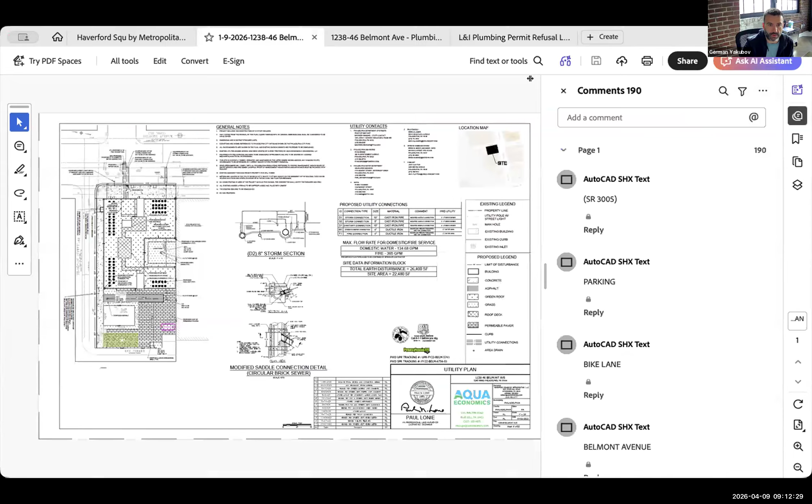All right, Chairman, I'm going to interrupt you for one minute because for the record, we have to establish ownership. Sure. The owner is listed on the official documents as Haverford Square Metropolitan One LLC. Could you please, for the record, state that you represent that entity and you are the owner of the property? I do, and I am. Perfect. Sorry I interrupted you. Please proceed. No, it's okay.

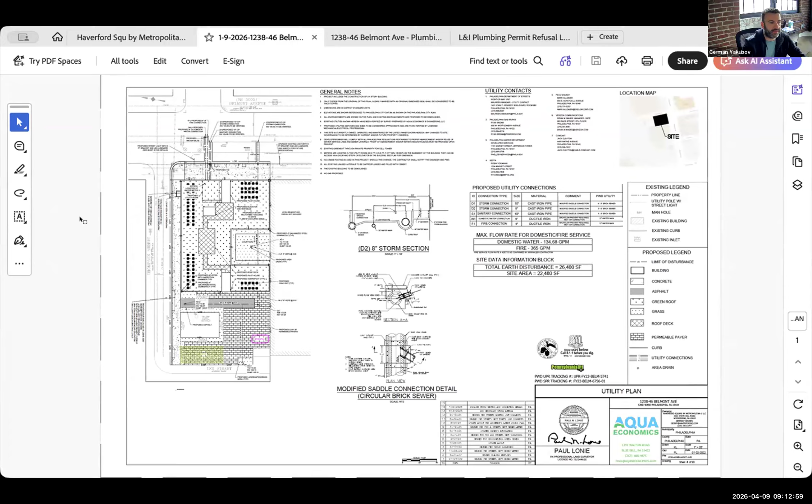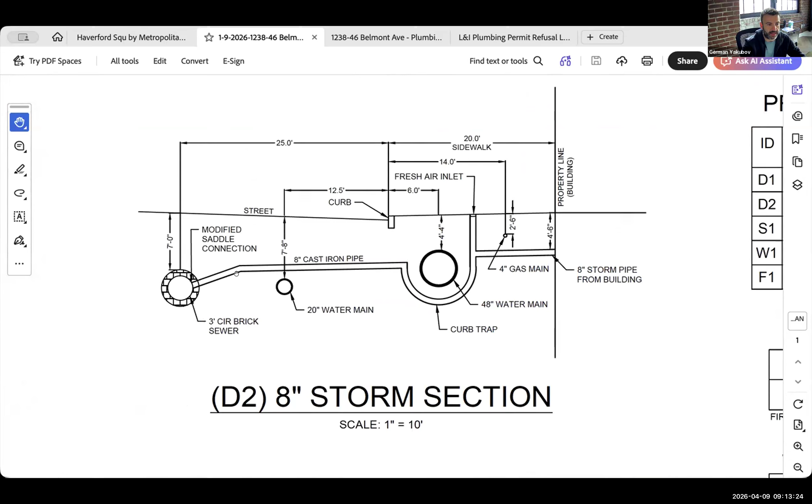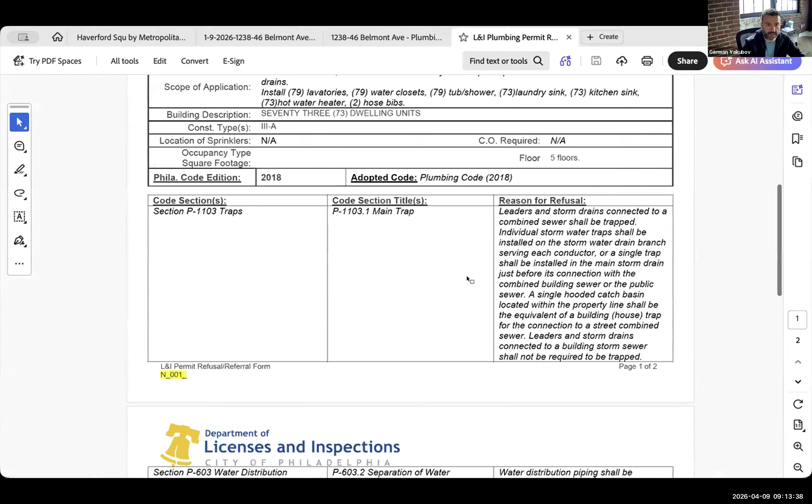So I think the issue is that there's a pipe in the way of us getting to the brick sewer, this 48-inch water main. So we can't go up above it, I guess. So the plumber has suggested building this custom trap that would, I guess, go underneath the 48-inch water main to get us to the brick sewer. And I guess part of that setup is against the code. So that's, I guess, the gist of it. Rudy, if you want to talk about how you see this.

So based on the depth of the storm that comes outside the building, we cannot be less than 3 feet exposed under the ground.

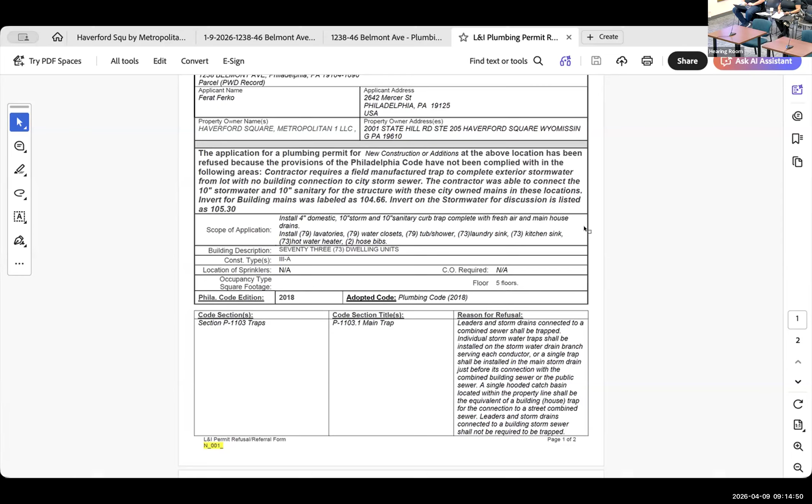Just a moment, Mr. Tafani, we are having some difficulty understanding you. Do you have multiple devices with you? I heard, sorry, but I'm not sure what came after because there's an echo on your end. Is it good now? No, could you attempt to mute your device, please? You hear me now? It's still a bit garbled. Do you have multiple devices streaming? I just had my phone, but I turned it off. I can't understand you, I'm sorry. Just a second, please. Rudy, could you try it again? You get feedback, Rudy. I think you're next to a speaker, or you might have a phone and a speaker next to you. That's the problem. Let me try to do it different. Rudy, do you have a headset on by any chance? No, I don't have it at this moment.

Okay, I'm going to direct a question toward you. The plumber of record is listed as Ferat Ferko. Could you let the board know what relation Rudy has to the project? I think he's Ferko Plumbing. He works for Ferko Plumbing? Yes. Okay. All right, Rudy, let's give it a try.

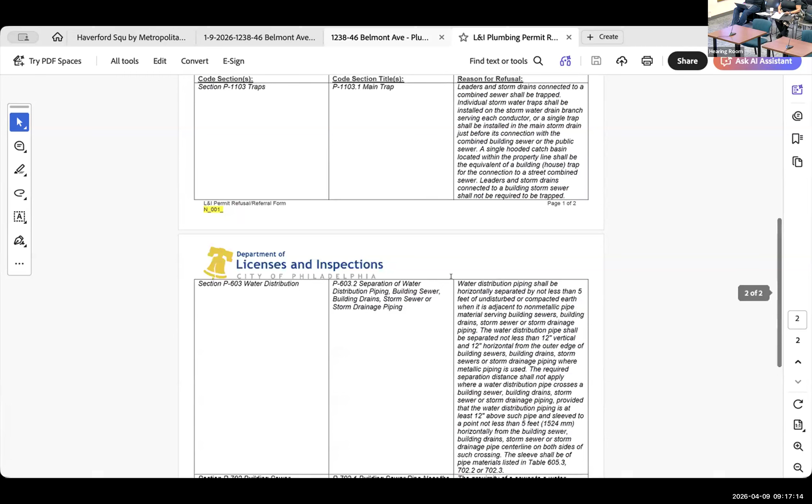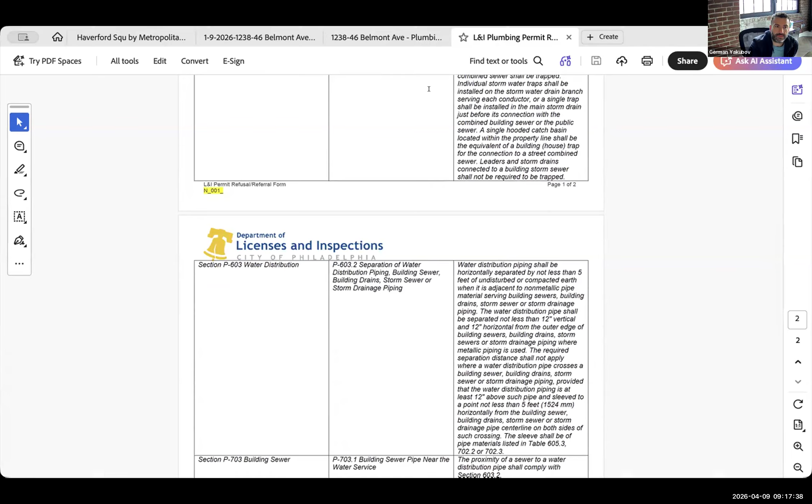I think it's the same thing, but I need to log out and log in again. Okay, let's give that a try. Sorry about that. He's gonna go out and come back in. Hello, everyone. It's a little bit better, Rudy. Rudy, can you talk to us a minute? Yes, I can talk. Great. Much better. Okay, gentlemen, please proceed.

So in this case, we have an 8-inch storm line coming outside the building, and based on the existing utility plan that we had in the beginning, it shows that the depth of the 48-inch water main was 3 feet, and we assumed that we could go underneath because we couldn't go less than 3 feet on top of the water main with our storm line. But physically, after we exposed the front of the building and the 48-inch on the sidewalk, it came up that the 48-inch water main was not 3 feet deep but 4 feet 4 inches deep.

So in this case, it interfered with us going underneath, passing the water main, and then installing the trap, because we have a 20-inch water main in front of us before we reach the sewer. So in this case, we cannot make that connection.

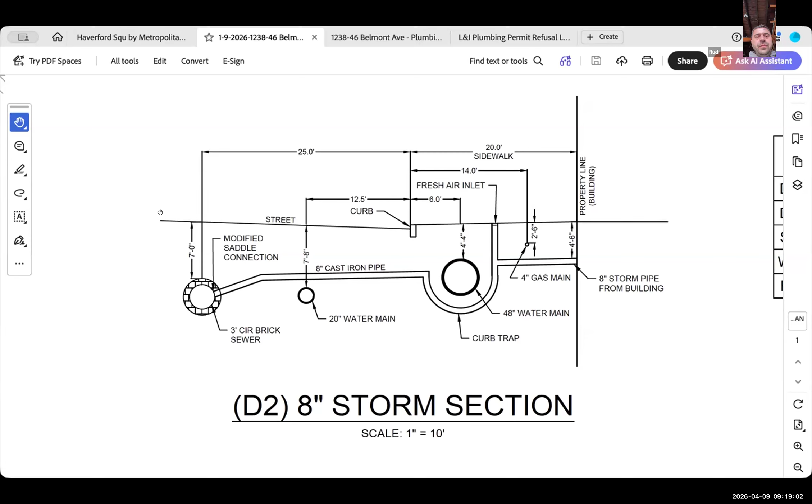Okay, can you explain to the board how you're proposing to construct the trap that you're showing? So my proposal was to build a curb trap, because it's going to be only stormwater, not related with sanitary. Building a huge trap passing the 48-inch water main, and that's going to let us make the connection straight to the sewer.

And what do you propose to construct a trap out of? What type? It's going to be all cast iron fittings. Following the code, to be at least 1 foot away from the water main, and it's just going to be built by us.

Okay, just to establish for the record, the sewer you're tying into in the cartway is a combination storm and sanitary, correct? This is a combined sanitary and storm. Combination, correct? Okay.

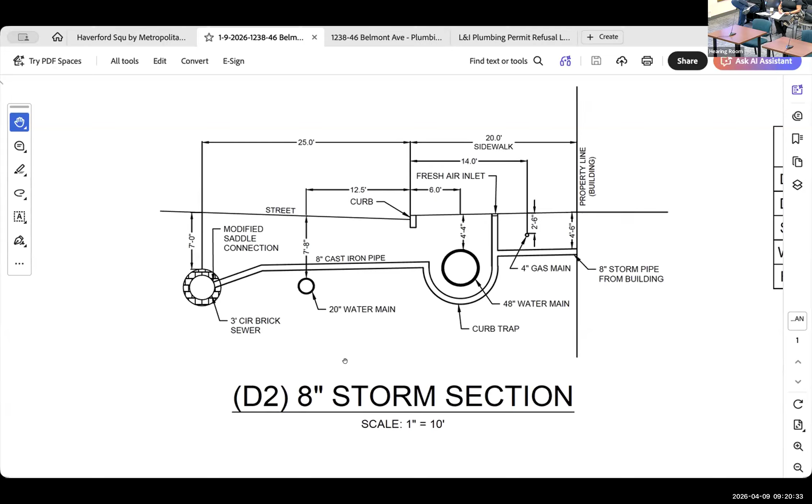All right, what we're going to do now, gentlemen, is the board will begin to ask questions. I'll call on the board members one at a time, starting with myself, Walt Krasinski, I'm chairman of the board. My question is, you showed two other connections. Did you have any problems with the other connections shown on the utility plan?

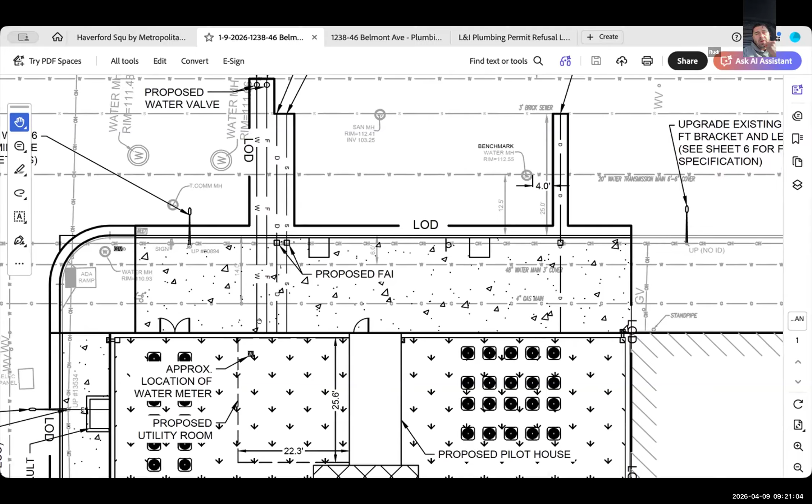We didn't have problems with the two other connections because we are able to be on top of the water main. But the only problem here, if we go on the proposed storm connection, we cannot connect the backyard water and the courtyard. Okay, all right, that clears a little bit up.

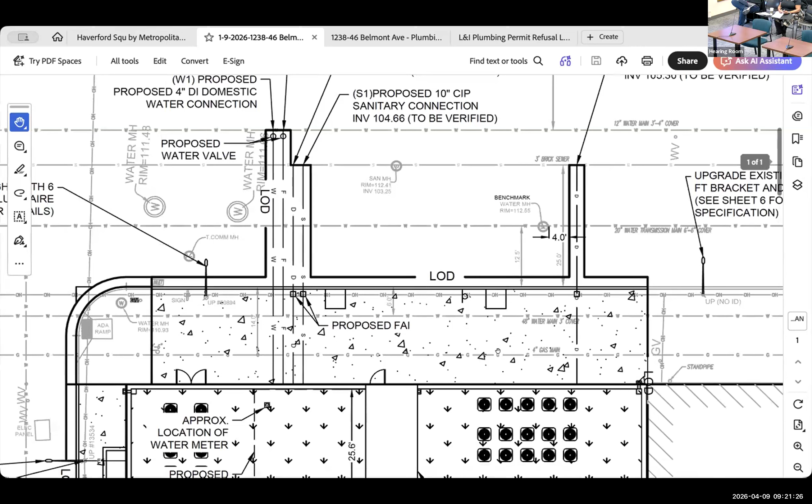The other two connections that you made, the storm connection and the sanitary connection, they are actually regular house traps with fresh air inlets? Yes, correct. Okay, perfect. You can clarify that when we get to you, if you would, please. All righty, thank you. That concludes my questions for right now. I'm going to go with the rest of the board.

Mike Bellata? No questions. Okay. Bill Dobbins? Do you want a mic for me? Have you ever built a trap like this before? What is your experience? So this is going to be the first time. We haven't had any of these problems before. This is the first time we're encountering this problem.

I'm figuring he needs to use about 2 3/8 bends. Actually, we may not use the bends. It's just going to be poured or Tyseals. I'm sorry, I was a little bit joking there. I said bends, eighth bends, but okay.

Mike Ingram? Bill, you were done, right? Yep. Thank you. Michelle Brisbane? Thank you. Shane McNulty? Dave Hoffmeister? One quick question. Has it been looked at to combine the connection that's a problem, extend that lateral to connect to the lateral that isn't a problem? In other words, I'm looking at a foot or so difference in elevation. Can the right lateral extend left and connect to the lateral that works?

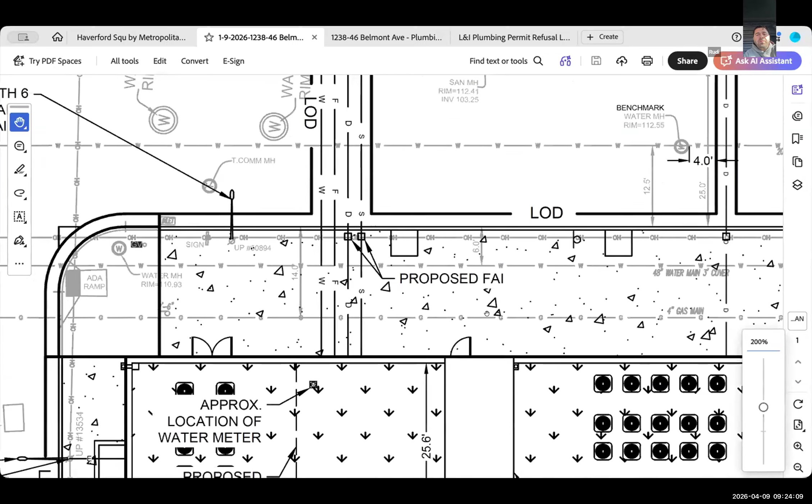So the connections that were already made are indicated to be at 104.66, and the new connection is coming out at 105.3. Yes. That indicates to me that the connections that are already made are deeper. Physically, the measurement on the plans doesn't correspond with the existing field condition. Understood. I have no further questions.

Thank you, Dave. Brian Gilbert? Yes, so what is your proposed slope on this 8-inch rainwater? 1/16 per foot. 1/16 per foot. What is your total distance from the building foundation wall where the building sewer begins to where you're proposing your curb trap?

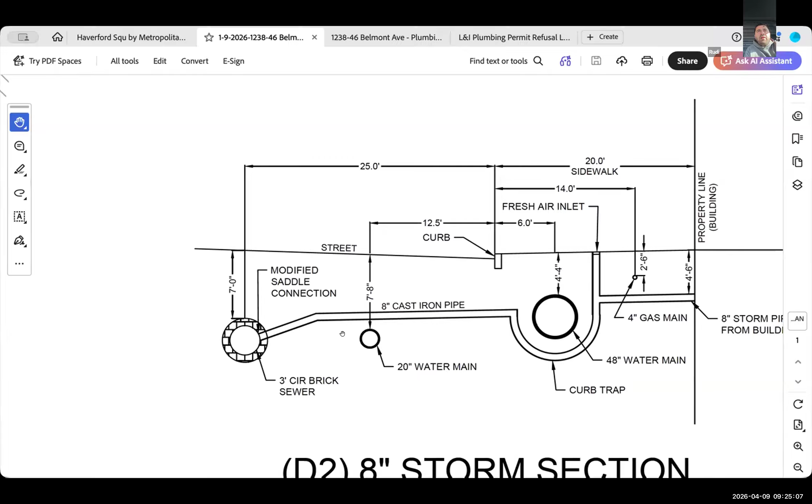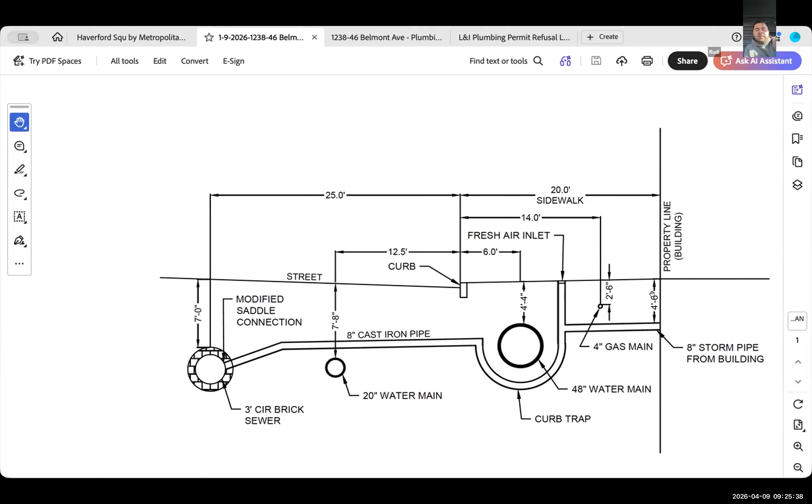I don't have that right on me. So it looks like the sidewalk's 20 feet, and I don't know if these are to scale or not. I believe the water main is in the sidewalk, right? Let me interject. The distance on the property line to catch the backyard, from back here to the front. Yes, I can get that for you. Give me one sec.

And you're saying this particular rainwater is an issue because you're picking up courtyard drains? Yeah, in the backyard. The issue is there is no sewer in Thompson Street, so we have to pretty much run it all the way from the back of the property to the front. So it's quite a long run. I believe it's 100 feet. Might be more than 100 feet actually.

Is this running completely under the structure, or do you go out to an area where you would have no structure above you? It's only the courtyard that has no structure. So you have to maintain your 3-foot depth requirement there? Yes.

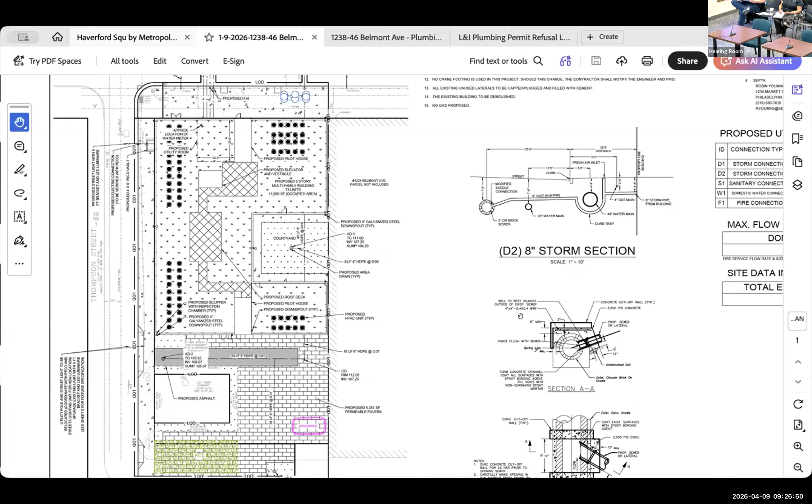Okay, I have one more question. This curb trap that you're proposing, you plan to build it in field. How do you plan to build it? Just cast iron materials. What fittings? Elbows, 45s, underground band, and tight seal. Underground band? Yeah, heavy duty band. Underground band's prohibited except for in the case of a curb trap replacement. We can use just hub fittings.

So service weight pipe, do you plan on using lead and oakum joints or push gaskets? Push gaskets. I have no further questions. Thank you. Janice Woodcock? Janice, can you turn your microphone on, please? Thank you.

Were the pipes in this site already installed when you discovered the condition in the street? Yeah, the pipes on the building were already installed. So the variance is being caused by not doing the street work first? Yes. No further questions. Thank you. Sarah Poindexter?

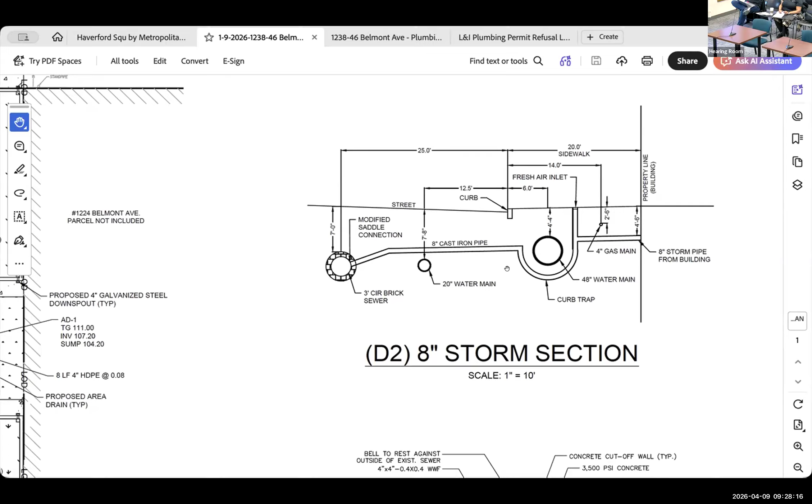Well, can you walk us through the improvements on the site? I'm kind of having a hard time understanding all the hatch marks and what's building. Sure. Sorry. Thank you. You just walk us through the improvements on the site, what's building? Sure. So it's new construction of a new 5-story building that occupies a little over 110 feet from the street to the rear of the property, with a courtyard in the middle here.

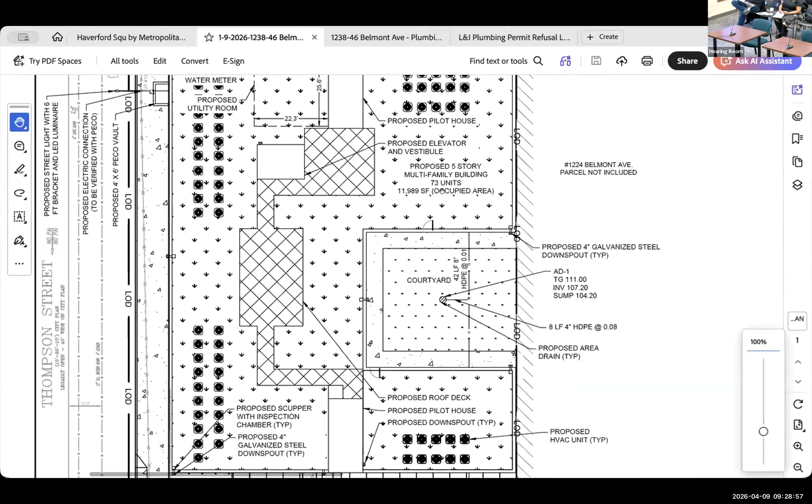So there's 73 apartments in this building, with a courtyard in the middle. What's in the rear that's kind of causing the issues at the end? The rear, it's an open yard / parking lot. That's a parking lot back there? Yeah. Okay, and where is your curb cut for the parking lot? Right here. That's the driveway. And then on Thompson Street, you said that there's no sanitary line, is that correct? No, only water. I wish there was.

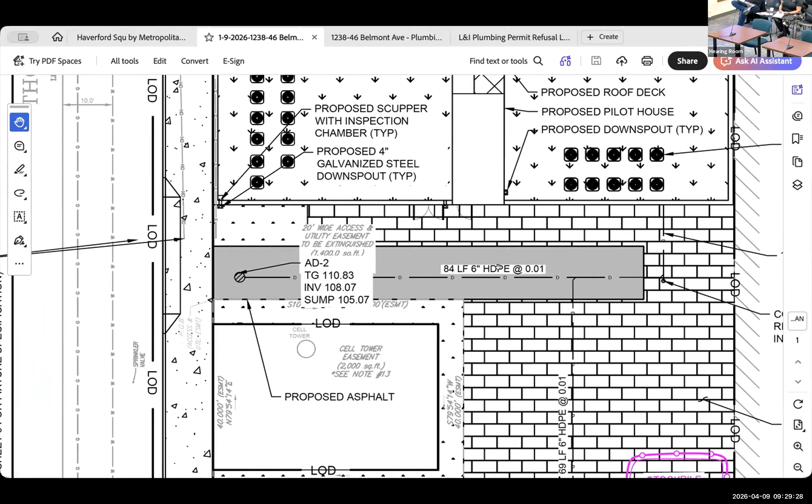And then if we go back to the utilities that are serving your site, what kind of survey did you do? Did you do down measurements at the manholes to confirm the inverts, or is this just from the PWD as-built? It was from PWD. Okay, so there wasn't any field confirmation? We followed the PWD information, and the only information that we had was utility plans and the measurements on the utility plans, and that's how we ran the storm line on the building. But after we exposed the sidewalk, the field measurements were different. So that gives us the problem.

Sorry, after you expose the sidewalk, can you go through that one more time? So the utility plans provided us the information about the depth of the utility on the street and the sidewalk. We followed those plans and we ran the storm to the building. After we got everything ready to make the connection to the street, then we saw that those measurements didn't match with the actual utilities in the field.

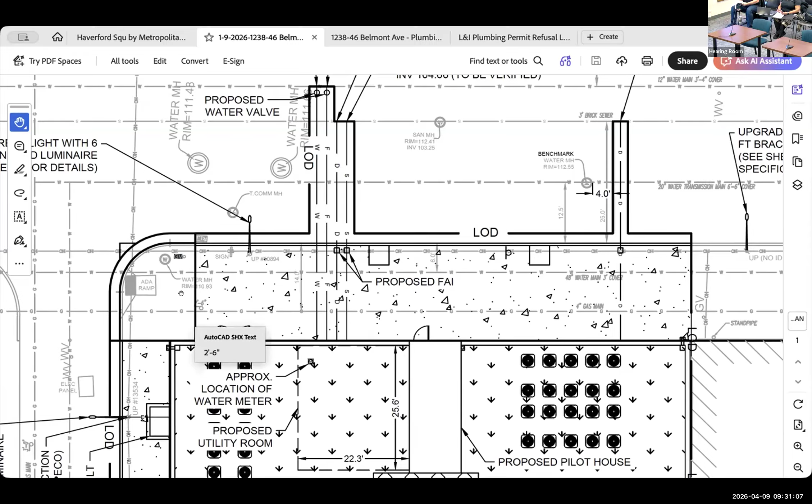Okay, so I see a 20-inch water transmission main with 6 foot 6 cover. Is that the label I'm seeing? Look at the benchmark elevation. If you go to the benchmark in the road and then go to the right of that, it says 20-inch water transmission main. Keep moving to the right. There we go, 20-inch. Is that label correct? So the 20-inch water main is not 6 feet 6 inches; it is deeper physically on the site. That's deeper than 6 foot. Yes. Okay, so if you go back to your cross section.

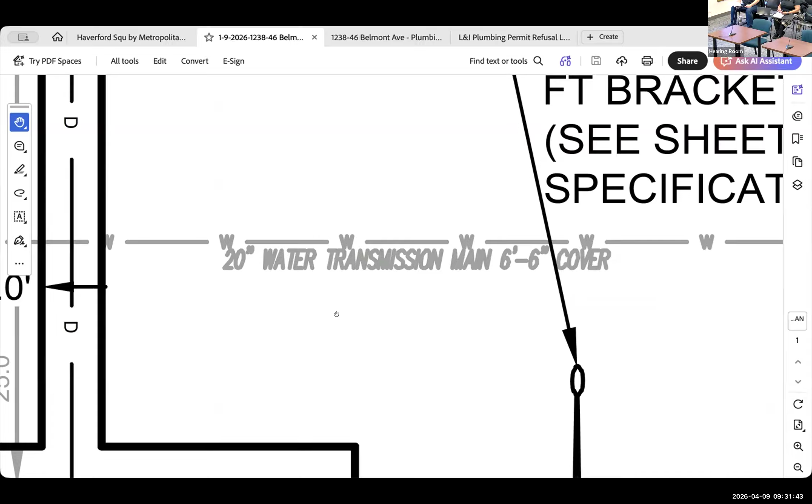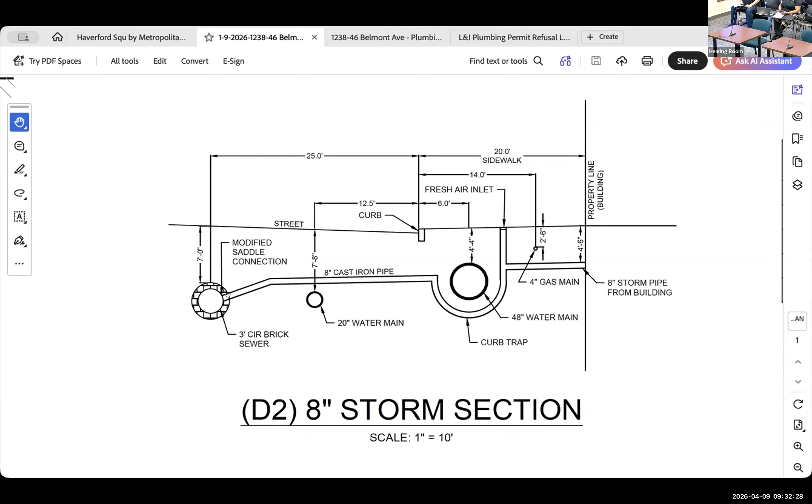So why does that show 48 inch? Does that upsize at the location? So this is on the sidewalk. Oh, I see. It's under the sidewalk. Okay, so that's deeper, and then the 48 inch is in the sidewalk. And you're saying that there's a sewer lateral and a storm lateral that are able to go over the 48-inch water main and make the connection. Yes. Because this one has such a long distance to go. And can you show again on your site what is the area that's kind of causing that long storm run?

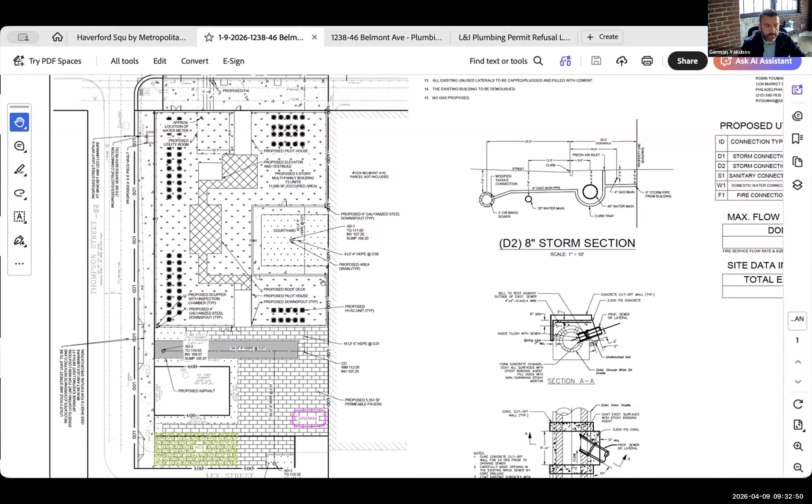You mean from here out? Mm-hmm. Yeah. Okay. So the whole site is 200 feet deep. Yeah. I guess my concern is that it looks like it's a pretty flat site. Like, what kind of analysis did you do for the hydraulic grade to make sure that this isn't going to back up the system, adding this type of dip in your line?

That's Kenny. Are you on the line? Kenny Lin. Yeah. Kenny. I see him on here. They're from the... Let me see if you can hear us. Let me text them real quick.

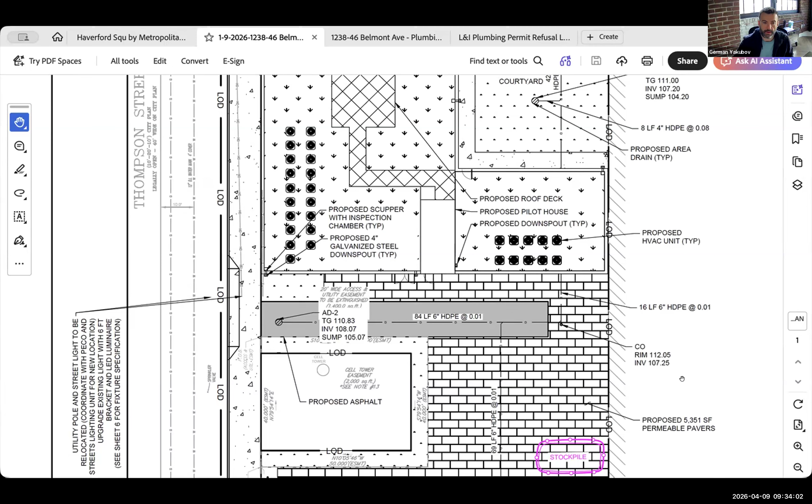They're the civil engineer. I guess one more question too, just what's the depth of the line running on the site? Like, what kind of cover are you proposing in the rear? On the rear, it's almost 3 feet deep. Did you consider shallowing that line to see if maybe you could connect to one of the other mains above the water main? We can't, because we already had a storm, and in the back of the building, the existing 10-inch, it comes higher than the parking itself.

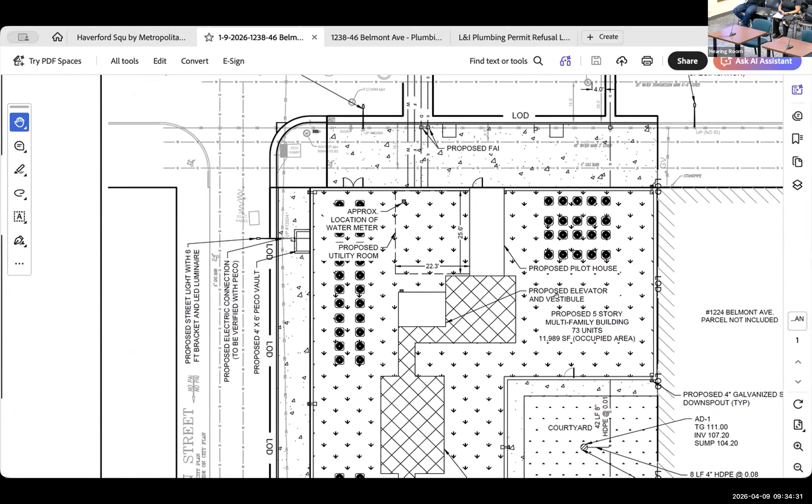Hello. This is Kenny. Can you hear me? Yes. Yeah, sorry, I had trouble unmuting. Timeout, Kenny. We're gonna have to swear you in. You haven't been sworn in yet. Kenny, could you please state your name and spelling of your name? Hi. Yeah, my name is Kenny Lin. So that's Kenny, and then last name is Lin. Could you please raise your right hand? It's risen. Do you solemnly swear the testimony you're about to give is true, so help you God? Yes. Thank you. Please proceed. Yeah, sorry, could you repeat your question, Sarah?

Yeah, so Kenny, I'm just trying to understand the stormwater management on the site. Are you retaining all storm on the site? Does this trigger stormwater requirements? Yeah, this triggers PWD's technical stormwater management requirements. So we essentially have to retain all the water on site. Okay, and I'm just trying to understand what other solutions were considered before this one. Did you look at shallowing the pipe on site or adding more fill, or was there any way to actually go over this water main by testing different solutions on site?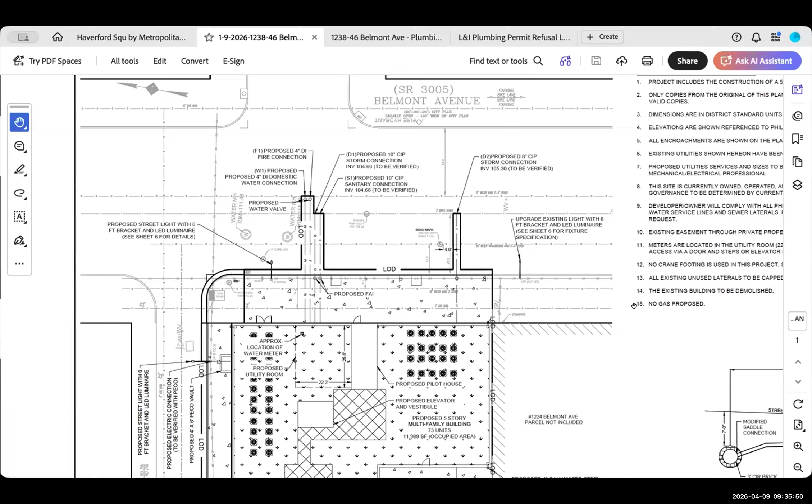Unfortunately, no, because since this is the utility plan that German's sharing, it doesn't really show the grade. But starting from the rear of the parking lot, it actually flows towards the rear, towards the next street. So we're kind of fighting grade at that point, and to maintain the 3 foot cover requirements, we were unable to really go any higher. But each of the drains do have the top of grade and invert elevations. And there was a green roof here as well.

Kenny, did you do any analysis, like a hydraulic grade analysis, to see what would happen with adding this dip in your line? As far as you're talking about this new trap? Yes. I have not. Okay. And I guess just the last question I have is, I'm assuming that this isn't a possibility since there's a 48-inch main there, but did you work with PWD at all to see if an extension along Thompson Street would be a possibility for sewer? Oh, I have not. Okay. All right. That's all my questions.

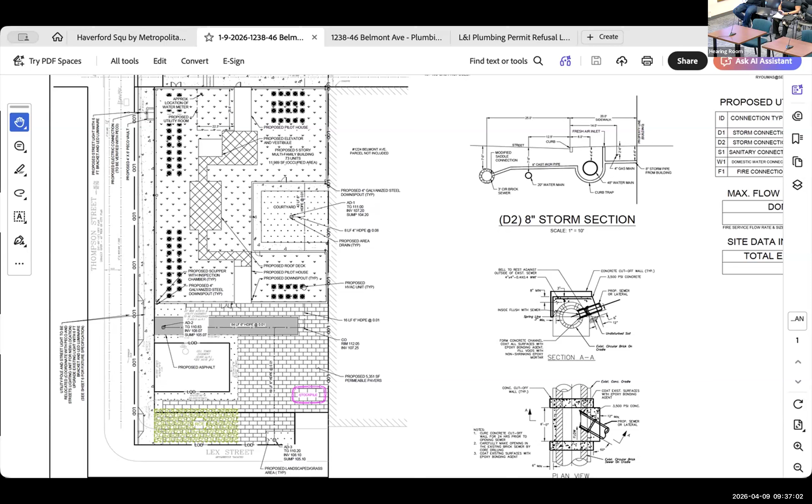Thank you, Sarah. I have a couple follow-up questions, if I may. All right, I'm at the detail with your proposed trap. So my first follow-up question is the downspouts and the area drains, are they independently trapped? No, they're not. Okay, that's my first question.

So my last follow-up question is, has there any consideration been given to placing a regular house trap on the other side of the 48-inch water main and then travel the 8-inch storm directly over top of the water main, drop it down into a regular cast iron trap and then connect it to the sewer? Is there enough room there? To me, your drawing indicates that there would be. The back end of the trap would be in the street, but the fresh air inlet would appear that it would still be on the sidewalk. Has there any consideration been given to that?

So, but still, in this case, the reason why we're suggesting the curb trap is because we need to find a way to pass this 48-inch main because we cannot stay under the 20-inch main. We have to stay on top of the 20-inch main. We cannot tap the sewer on the bottom, and this is only storm water. There is no sanitary related. That's why the curb trap was not giving us any problem with clogging or any other issues.

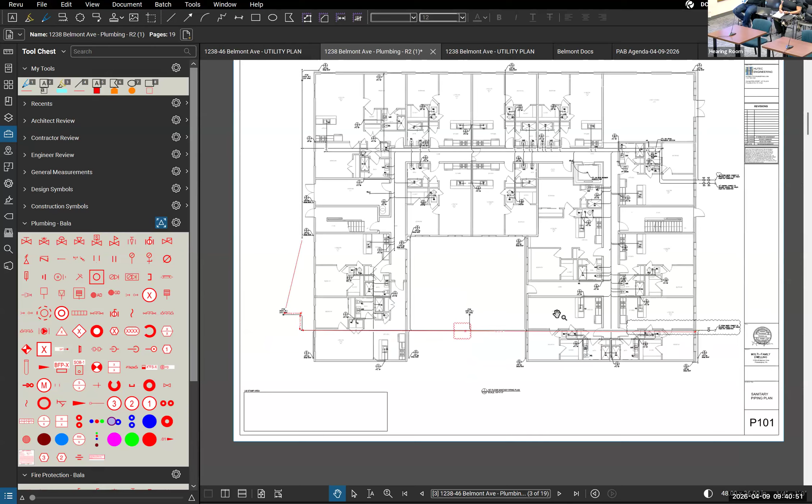My second question would be, have you looked at taking this rear area drain to the adjacent rainwater conductor or exterior lateral here and begin your lateral at the courtyard area drain so as to rise this? Have you guys looked into potential solutions other than the curb trap?

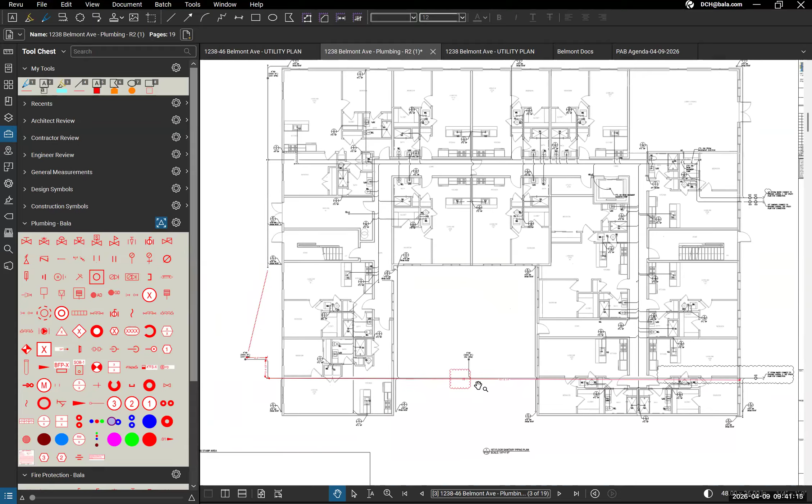Sarah, how could you miss that? I guess I can speak from our side. We have not. I think one of the main problems is a lot of this is already installed. So we're just hoping that this solution would work. I have no further questions. Thank you, Dave.

Does anyone from your team have any follow-up information they'd like to provide to the board? No, it's my first time here, so I'm not sure what feedback. I guess we'll wait to see what you guys come back with, and if there's any feedback, we could. Okay. All right. You know, we're trying to find the most efficient solution. We can see that. All right. Board members, any follow-ups before we deliberate?

Shane. What did they say their original depth they were given by the water department was? The question is, what was your original depth given by PWD? Was it 3.5 feet, Rudy? Yeah, it's on the plans. I can open the plans. It's about a 1.5 foot difference from what's in the field. I think there was an issue because the connection that we initially made didn't have an issue. We didn't have an issue with that.

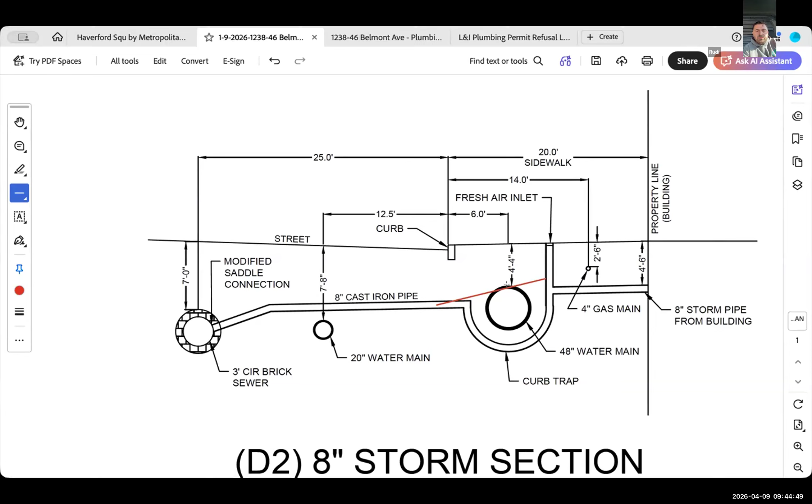All right. At this time, what we're going to do, gentlemen, is we're going to go offline, go off recording, and we will step out and we'll be back shortly. Mr. Kelly, can you show us off record, please? Yes, Chair. Mr. Kelly, can you show us back on record, please? Paging Mr. Kelly, Mr. Kelly. Yes, sir. Back on record.

We continue to hear case number MI 2026-001-514. For the record, German and your team, the second part of the refusal for this particular permit indicates a separation issue under code section P 703. It's been the determination of the board, because you have established that your connections will be cast iron and your pipe leading from the building is cast iron, the board has concluded there is no separation problem.

Thank you. All right. With that, for the main refusal for the trap, board, what say you? I motion to deny the appeal. There's a motion on the floor and seconded to deny the appeal for 1238 Belmont Avenue. I'll poll the board individually. Mike Bellata, deny. Mike Ingram, Janice Woodcock, Dave Hoffmeister, deny. Brian Gilbert, deny. Sarah Poindexter. And the chair votes no. By a majority vote of the board, your appeal for the alternate trap design has been denied.

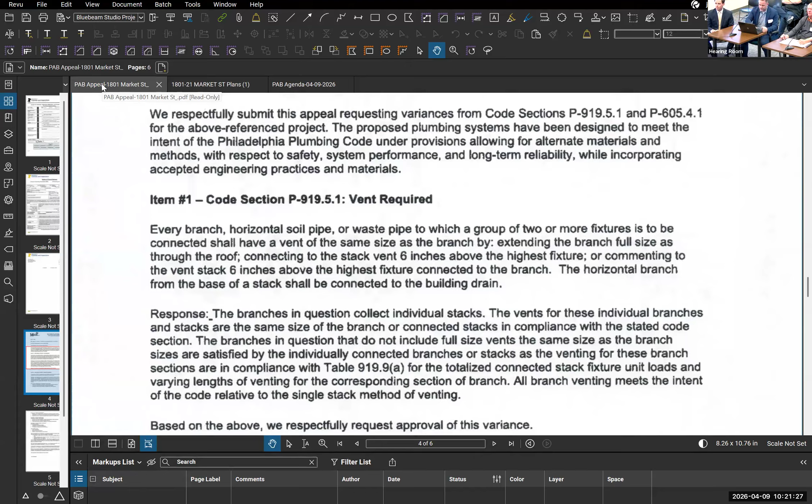To repeat the code, P919.5.1 vent requirements. Every branch horizontal soil pipe or waste pipe to which a group of 2 or more fixtures is to be connected shall have a vent of the same size as the branch by extending the full branch size through the roof, connecting to the stack vent 6 inches above the highest fixture, or connecting to the vent stack 6 inches above the highest fixture connected to the branch. Horizontal branch from the base of the stack to be connected to the building drain.

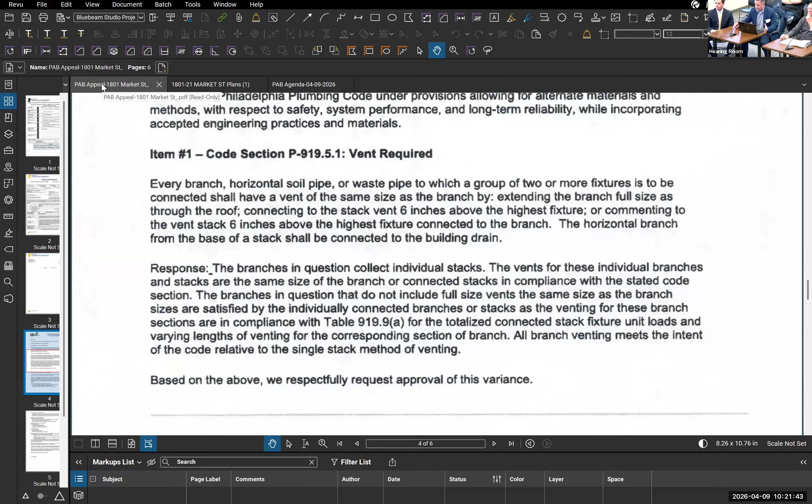So our response to this is branches in question collect individual stacks. The vents for these individual branches and stacks are the same size of the branch or connected stacks in compliance with the stated code section. The branches in question that do not include full-size vents, the same size as the branch sizes, are satisfied by the individually connected branches or stacks, as the venting for these branch sections are in compliance with table 919.9A for the totalized connected stack fixture unit loads and varying lengths of venting for the corresponding section of branch. All branch venting meets the intent of the code relative to the single stack method of venting.

And what I'd like to also add, which we noticed after submitting this response, we want to bring to the board's attention that the entire 16th floor is a mechanical equipment level, and the standpipes meant to collect condensate discharge documented on the branch piping at the 16th floor ceiling can be eliminated and not connected to the horizontals, to avoid and prevent potential trap seal issues, as there are existing floor drains on the 16th floor. We will utilize the existing receptacles on the 16th floor to take the condensate drain down to avoid that issue. We recognize that. We will update the drawings to address that.

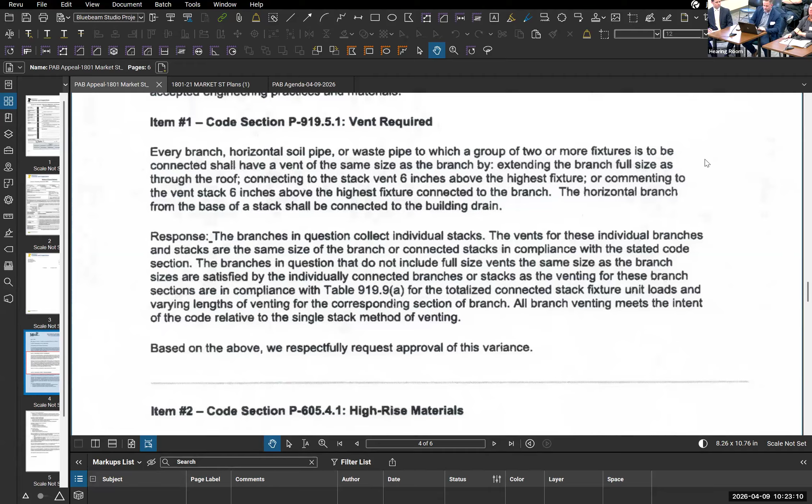Removal of those standpipes results in a vented sanitary collection system more in line with the intent of the plumbing code. I can show the riser diagram. Essentially from 16 up is collecting all the residential stacks. And of course, as we mentioned, the HVAC condensate stacks will be connected to floor drains now in the 16th floor mechanical.

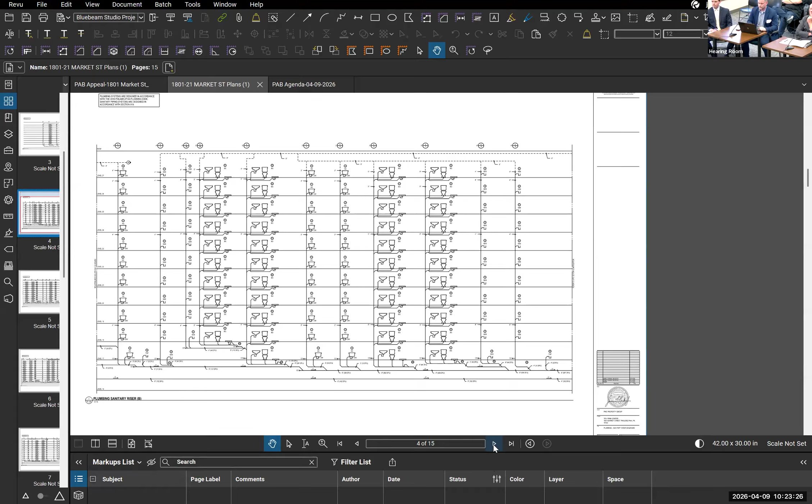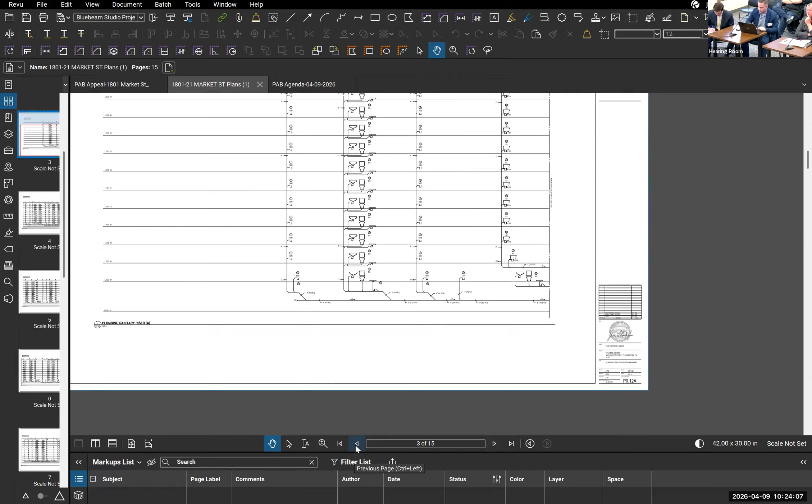Are there any questions? Anybody else would like to add? Anything else? Okay, so as you know, what we're going to do is the board's going to answer some questions one at a time as I call on them. So I want the record to indicate, if I understand you correctly, on drawing number P0.12A, B, C, D, E, F, and G, all individually connected fixtures on the horizontal branches marked TSP are going to be eliminated? Correct. Okay. And they will drain now into the floor drains in the mechanical room. Perfect, perfect. That was the only question I had.

Mike Bellotta, no questions. Janice Woodcock, Michelle Brisbane, Sarah Poindexter, no questions. Shane McNulty, no question. Bill Dobbins, Mike Ingram, Brian Gilbert. I just have one. Probably you already answered, but I want a clarification.

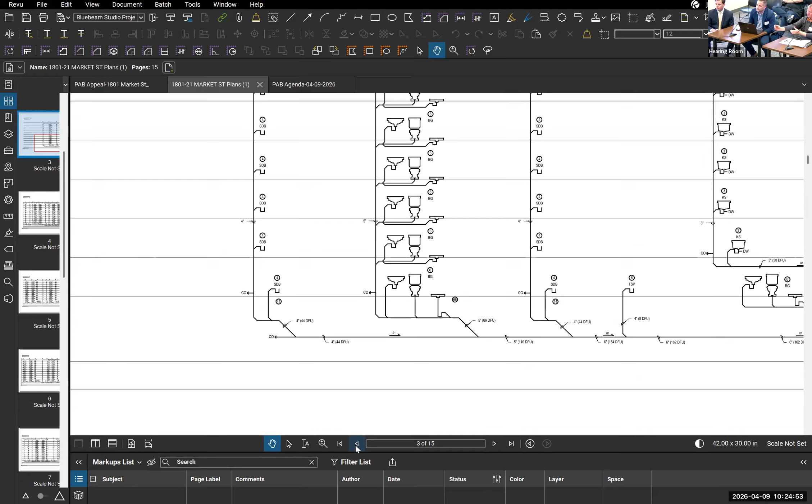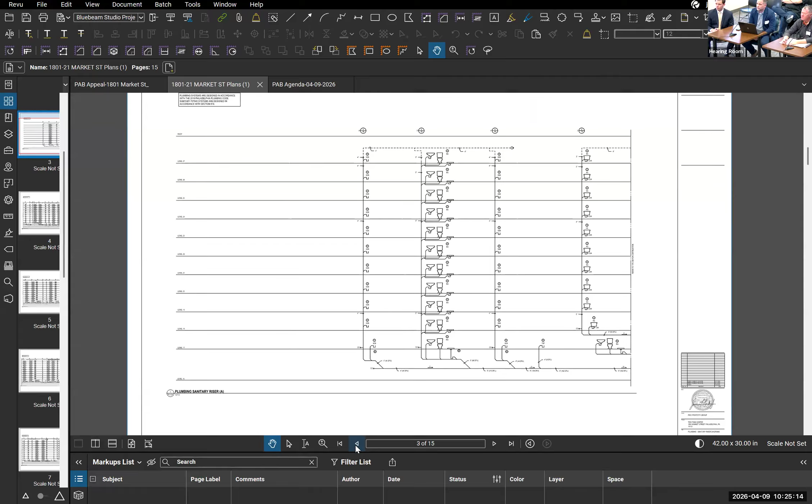So essentially you're changing the building's usage to residential from the 17th floor and up, and these branches are more serving as, say, the residential building drain, which if this was underground would be fully compliant with the Philadelphia Plumbing Code. Correct, sir. You do have a full-size vent. Correct. Yes. Show that. Full size, yeah, down for the building, 15-inch vent through the roof. Thank you. Sir.

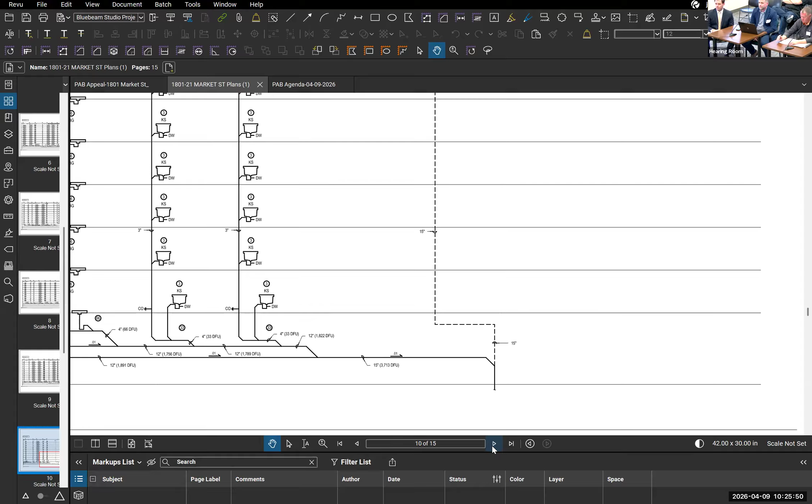All right, any follow-up information regarding vent sizes from the appellant team? How about from the board? Any other follow-up questions on vent sizes, branch vent sizes from the board? Hearing none, we will move on to the second component of the refusal and appeal, which is high-rise material for the use of PEX piping in the individual demised dwelling units in buildings above 150 feet.

Yes, sir. So to approach the rejection of code section P605.4.1, the required use of metallic piping in buildings exceeding 75 feet in height. Our response is the material used for the project when compared to copper meets or exceeds the performance standards. PEX's flexibility compensates for lower burst pressure via expansion under surges, matching copper's rigidity. Expansion tanks and pressure reducing valves are used identically to manage stack effects. We would also like to add the PEX system mitigates fire and installation risk through press fit or compression connections, eliminating open flame soldering, continuous runs with fewer fittings, reducing leak potential, installation within fire rated walls, maintaining compartmentalization in apartments similar to copper, and being fully internationally code compliant.

For the pressure and height considerations, PEX is rated up to 160 PSI at 73 degrees F, sufficient for buildings exceeding 150 feet. It's compatible with pressure reducing valves and pump systems to ensure hydraulic compliance. It's tested and proven in high-rise domestic water systems for multiple stories outside of the region. It's equivalent or superior when compared to copper. It has corrosion and scale resistance, critical in older adaptive reuse structures. It reduces joint count, lowering long-term leak risk, and has freeze and thermal expansion resilience, minimizing burst potential.

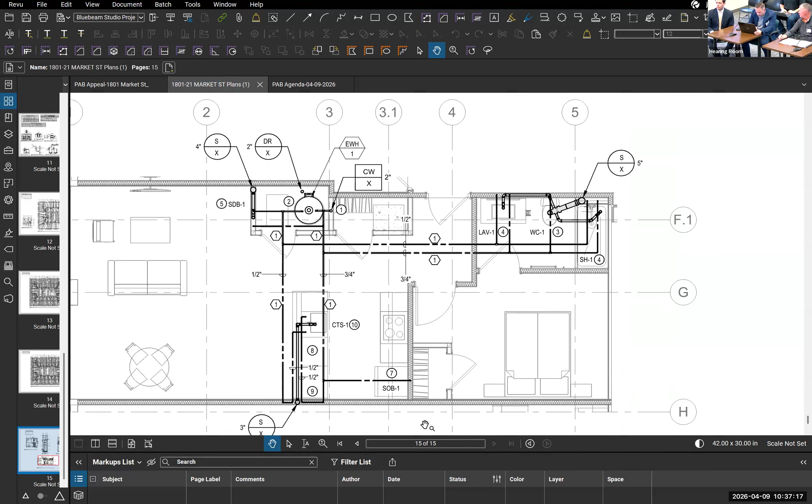We are providing, yes, let me share my screen. So looking at a typical floor plate, in the areas that we are providing fire safing where it goes through any rated assembly. The partitions between the apartments, I'd have to check the architectural, but I believe that's a half-hour rating between, and I don't want to speak for the architect.

1 hour. It's really what we do. It takes it closer to an hour and a half. Hour and a half, but not a 2-hour rating. So we are still complying with the hour and a half rating for any penetration through that wall. Because the exception in 605.4.1 requires metallic piping to pass through that demising and fire rated wall.

You will be penetrating one side of that system, and a fire rated wall is a system. It requires fire rating on both sides. We're going through the interior side of it. The exterior, or in this case, the demising wall on the hallway side is 2 layers of drywall on the hallway side. So it gives us a fire rating on the hallway side.

So are you topping those walls off? Topped off to both sides? Yes. And your fire rating comes from fire caulking on top and through the penetration that goes into the cavity. That's between each unit and corridors. And your proposal is to use metallic piping for risers and all horizontal mains in the common areas. That's correct. Anything going through floor or anything in common areas is metallic.

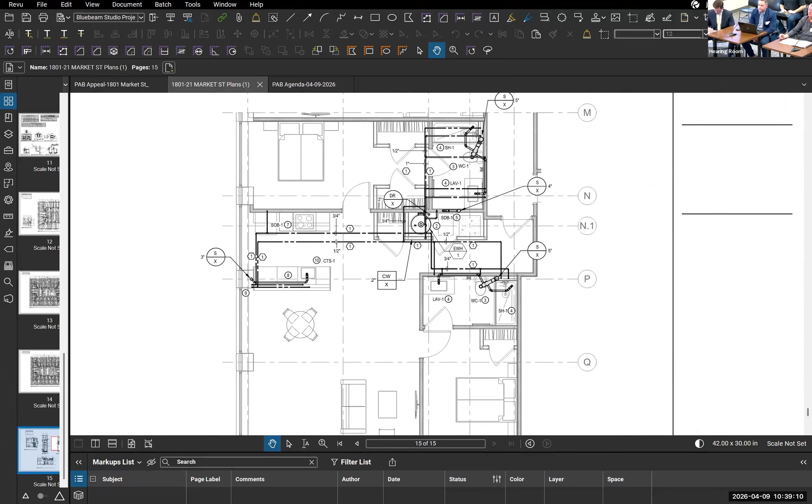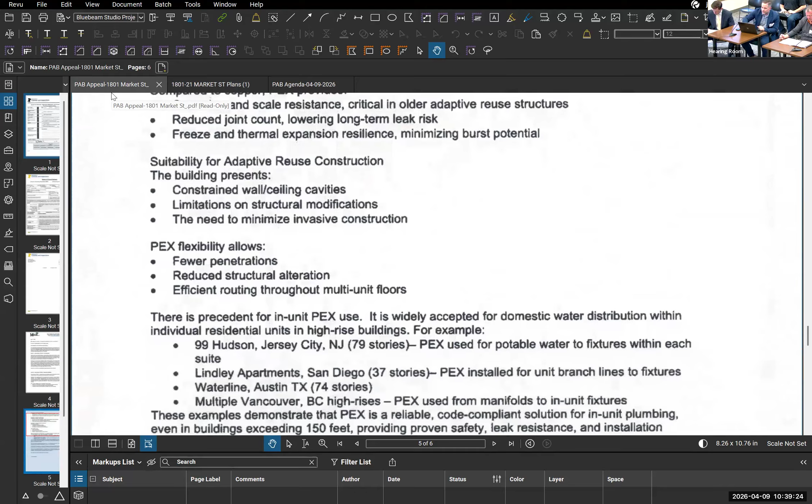Okay, just 1 or 2 more questions here. Can you give me a good idea of what percentage of PEX material is made using recycled materials? I'm sorry, can you repeat the question? PEX, what percentage of PEX is manufactured using recycled materials? I can't give you that fact. I don't know. I do believe the answer is 0. What about copper? I do not. It's around 60%.

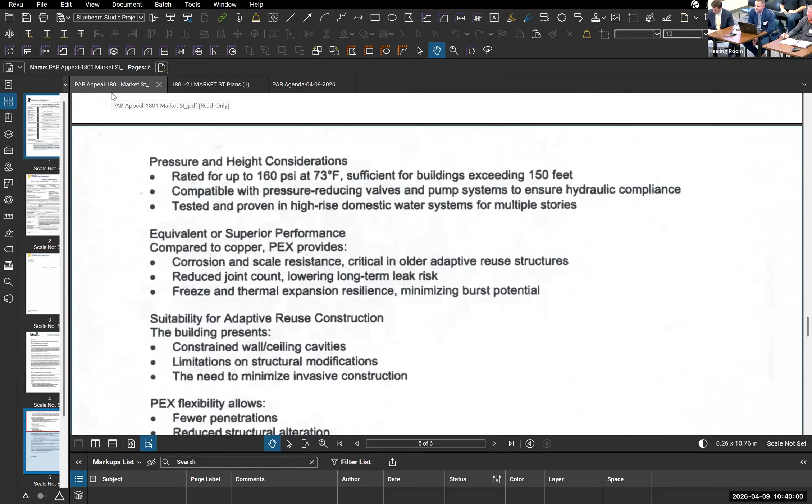I'm going to ask on the other end, when it is taken out of use, can PEX be recycled? I would assume no. It cannot. The percentage of copper tubing, copper piping, or metallic piping that is recycled when a building reaches the end of its usefulness is quite high. Would we agree? Agreed. It's a more environmentally sound material, copper. Okay, thank you. Thank you.

So I do have one follow-up question. We don't have any of the architects here, right? Just mechanical design and installer. Is anyone on the appellant side who are with us today aware of building code requirements, the delineation between 75 foot, 150 foot, and above 150 foot? Specific to Philadelphia, understanding that PEX is allowed up to 75. No, I'm talking in general, the general building code. Is anyone aware of that?

Are there any other triggers when the building exceeds 150 foot in height? I do not know at this time, but I have to research. That's a fair response. You're the mechanical guy. Because it's the board's understanding that when a building exceeds 150 foot in height measured from the lowest level of fire department vehicular access, that it triggers additional building requirements, especially with life safety and fire protection. So that's just something. Agreed.